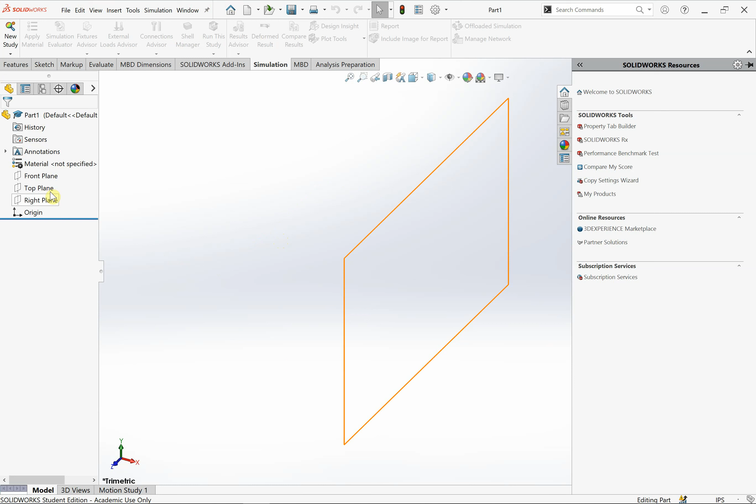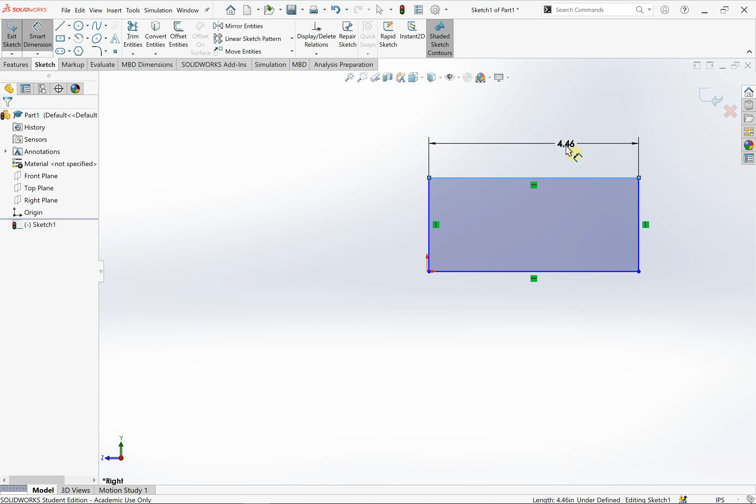And on my right plane, I'm going to make a new sketch of a rectangle. I'm going to use the 2-corner method. One at the origin, one up further away. I'm going to put some dimensions on this. This is going to be 1 inch by 0.125 inches.

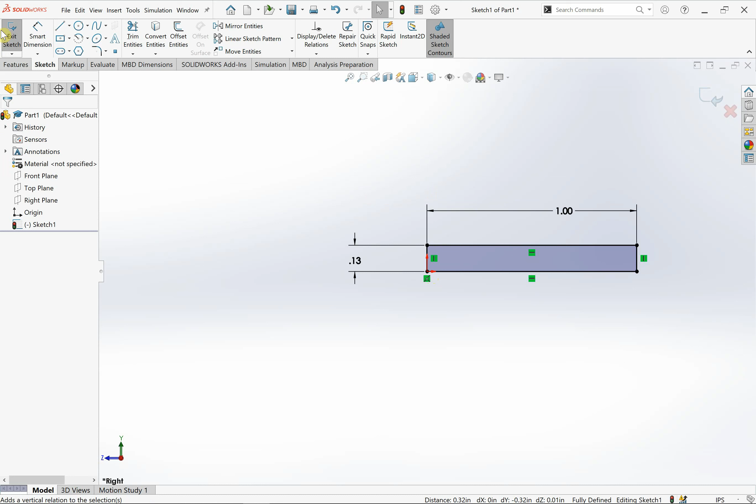And then I'm just going to move this back down to the origin because that's where I like things. Apparently I hadn't quite grabbed the origin when I first set this up. We're going to exit our sketch and we are going to extrude our sketch a total of 14.5 inches. So now we have our relatively long, thin model.

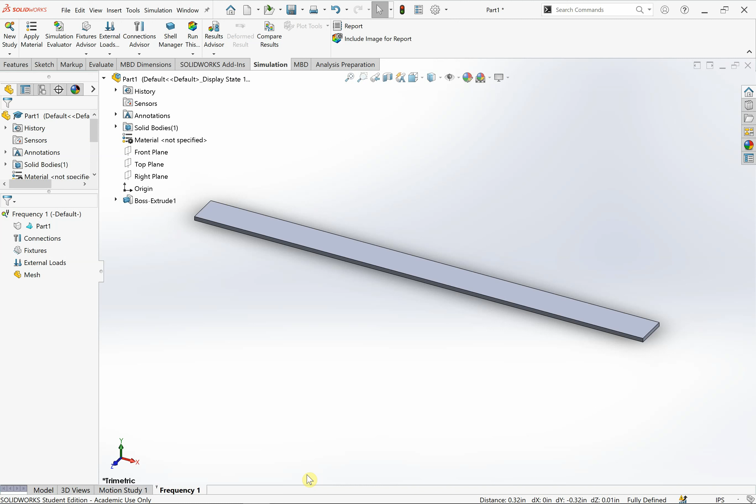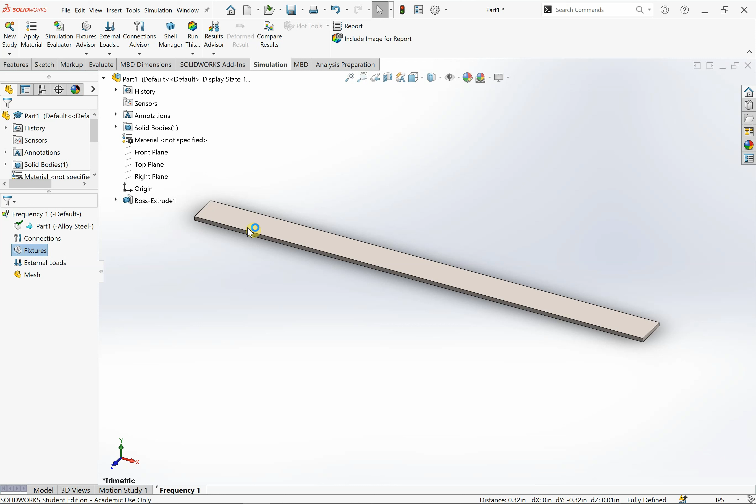We are going to make a new study, and instead of using a static study, we're going to use a frequency study. And click OK. We're going to apply material to this part. This part is going to be alloy steel. We are going to put a fixture on the left end to make it our cantilever beam.

So for the initial run, we don't need to put an external load on it. We're going to be able to find the natural frequency, which is a property of our system that we created. I'm going to create a mesh. I'm going to use a standard mesh with 0.25 and 0.0125.

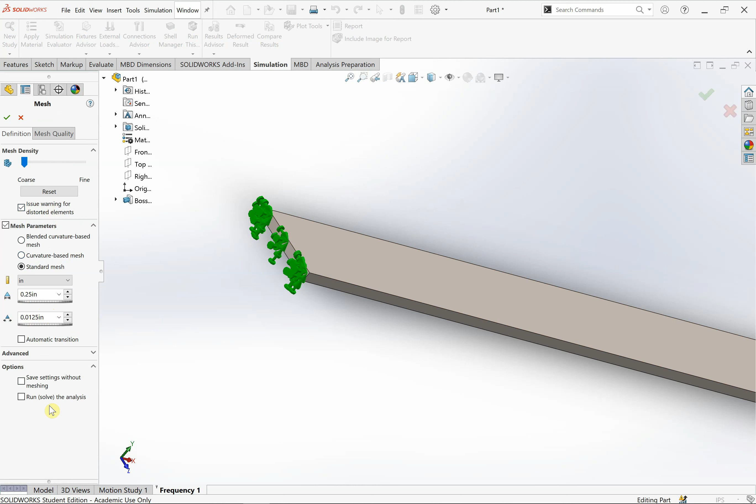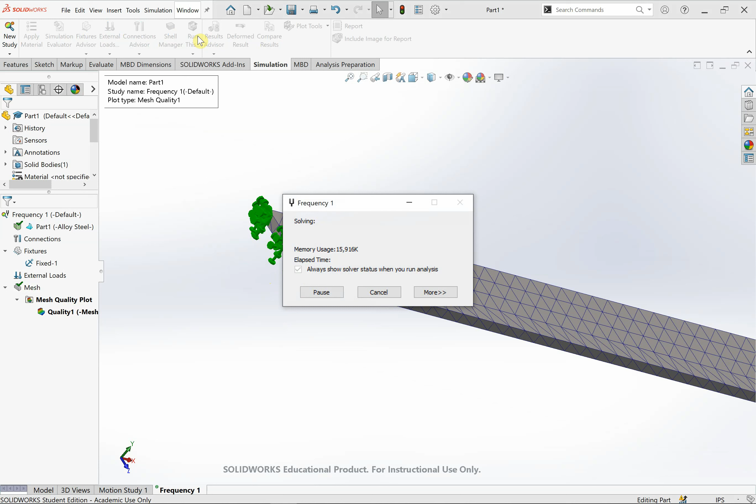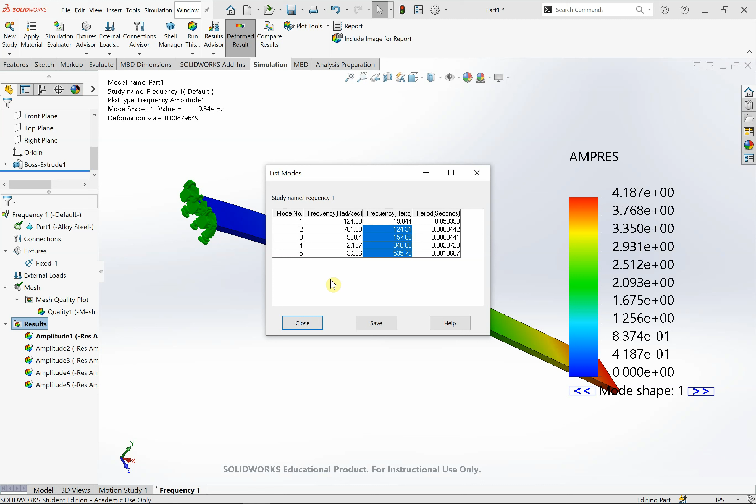So one thing to note is the third mode shape that SOLIDWORKS is giving us doesn't really match our third mode shape from hand, but you have to remember there are mode shapes that exist outside of the plane that we looked at. So besides comparing natural frequencies, we're going to look at mode shapes.

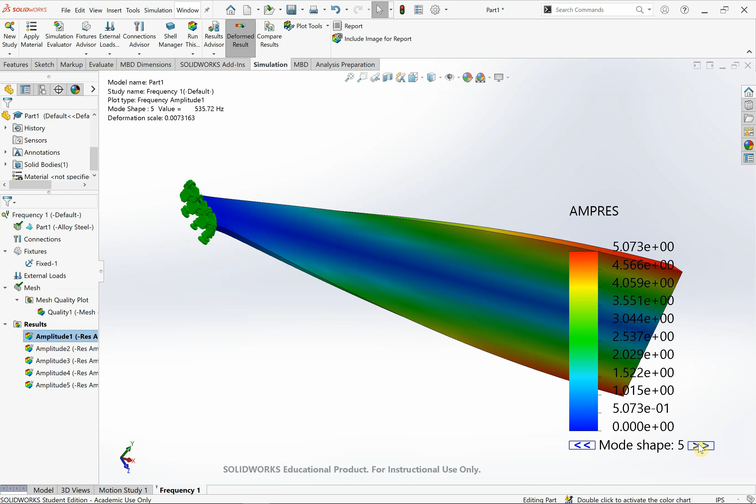When you make an amplitude mode shape, let's click edit here, it's going to ask you the frequency and the mode shape. If we do that, we have this first graph. We can also click through them. So this is mode shape 2, 1, 2, 3, 5, 1, 2, 3, 4, 5. Yeah.

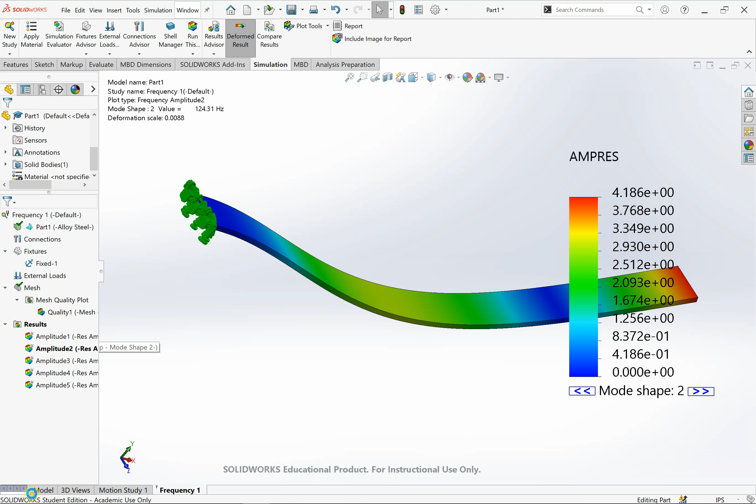Naturally, you then want to do mesh refinement, which I'm not going to do in the interest of time. What we're going to do is we're going to add an additional mass to this system. I'm going to go back to my 3D model. I'm going to click on this top surface, and I'm going to create a sketch.

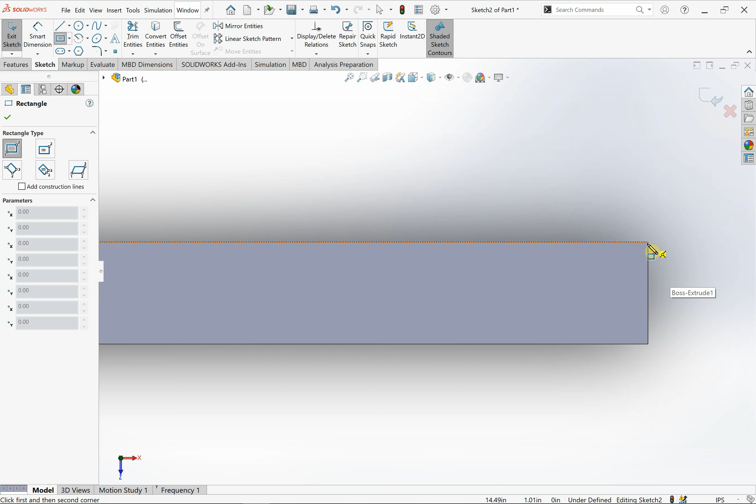This is going to create a sketch referenced to the top surface, and I'm going to put a rectangle, wrong type of rectangle, on this corner to give me a place to put my remote mass.

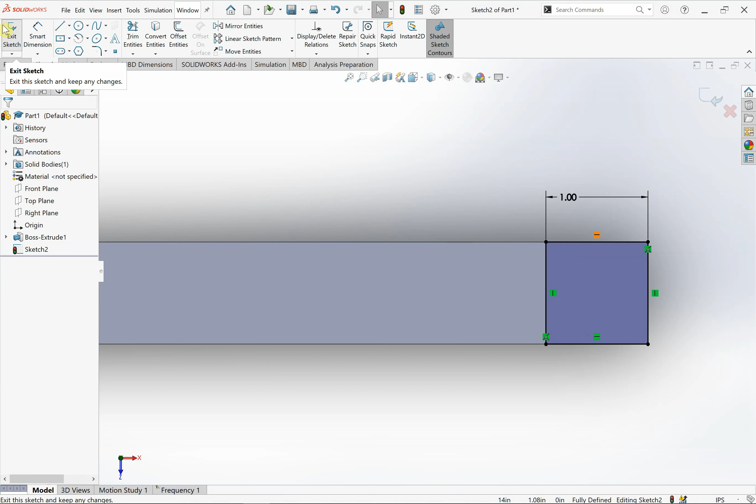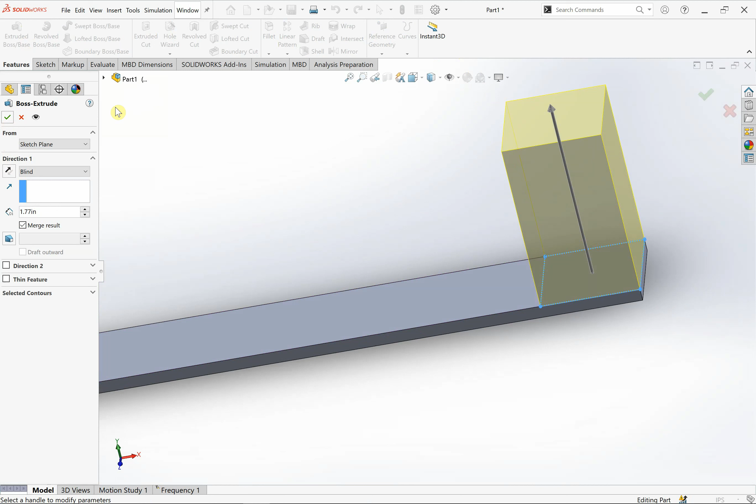I'm going to boss extrude this sketch upwards of 1.77. So we've basically created a nice little weight here. If I go back to our frequency study, we now have a weight on here. We have some warnings. Basically, our mesh is out of date, so let's create a mesh.